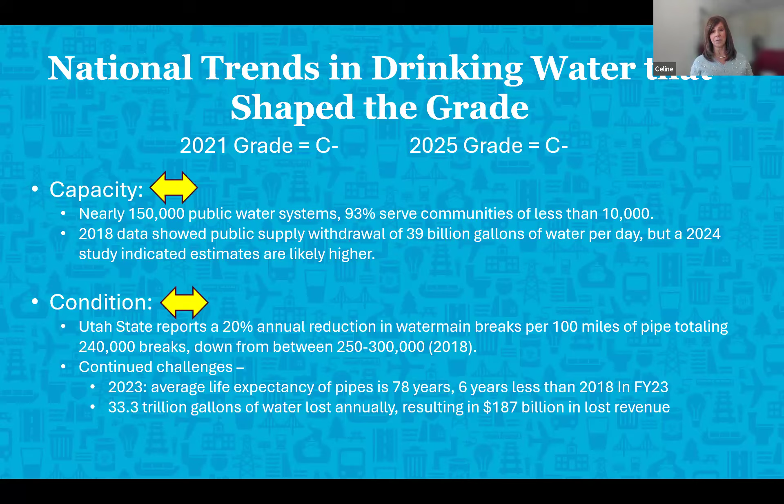So moving on to funding. Funding also pretty much remained flat. User rates have increased over the last 10 years. However, the majority of utilities surveyed by AWWA still felt like they didn't have enough funding to cover the full cost of service, both the capital and the operations and maintenance needs.

There was funding infused for the federal low interest loans for water capital projects, the Drinking Water State Revolving Loan Funds. But those funding levels really have not significantly increased for the drinking water sector. And we have a practice where a lot of that money gets earmarked by Congress for specific project grants, which takes money away from the states that can get those loan funds approved.

Under future needs, the needs have increased, not surprisingly, as things have been deferred, so that reduced the score in this category. According to EPA, needs have increased about 30%, with a total need of $625 billion over the next 20 years to meet a state of good repair, up from $473 billion previously projected.

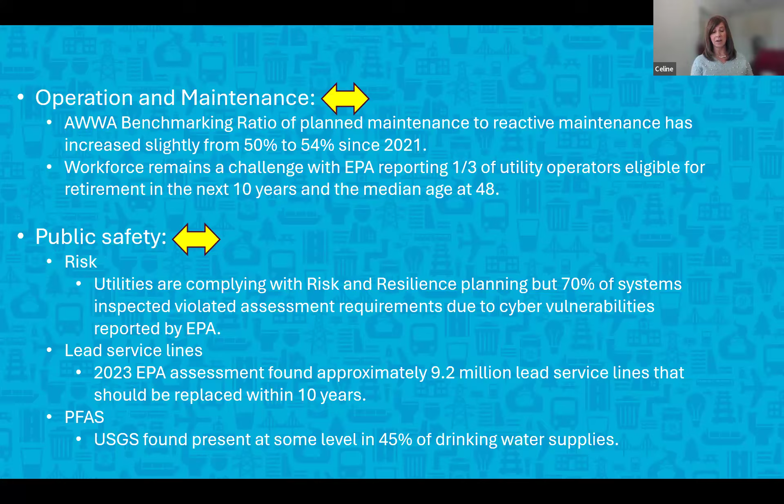Water quality issues continue to be a challenge due to lead service lines, a hot topic of the day. Having to replace over 9.2 million lines in the next 10 years is very significant. And obviously, we've all heard about PFAS and emerging contaminants that threaten water quality compliance and could impact 45% of the water supply, according to the USGS.

Resilience challenges have increased, which reduces the score in this category. Climate change and extreme weather, including hurricanes, floods, freezing, and droughts, continue to pose threats on infrastructure where pipes are breaking, pumps failing, and water quality being impacted.

Only 72% of utilities have completed their required risk and resilience plans, including updating emergency response plans, even though these were all due in 2021.

Innovation continues to advance, increasing the grade in this category. There's greater use of digital technologies and data-driven decision-making, leveraging things like machine learning, AI, and performance dashboards. AWWA shows that 43% of utilities plan to install new IT systems, and 46% plan to install digital meter reading, which provides greater access to data for decision-making.

Moving on to the wastewater report card. Again, the 2025 grade remained the same as the 2021 grade at a D plus. Overall, the team did not find any significant data or trends to change the grade.

In terms of condition and capacity, the grades remain flat. For capacity, the number of wastewater systems has increased to serve urban areas. However, some systems still remain stressed for capacity during wet weather events or in those growth areas.

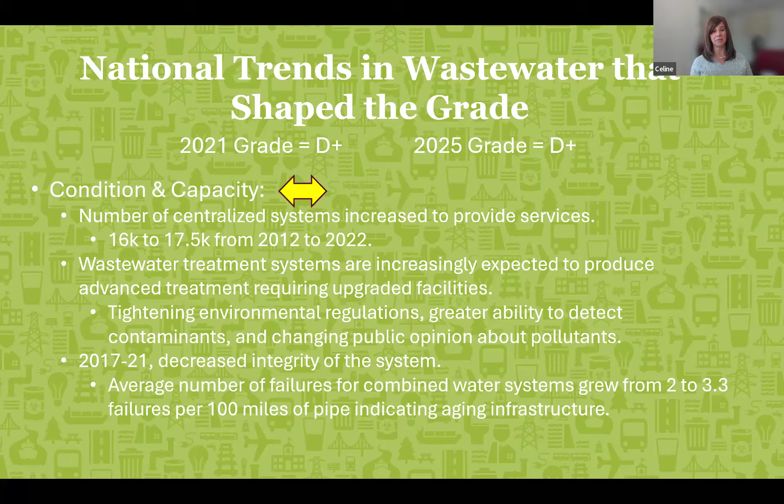Operations and maintenance remain flat, where most utilities have digital tools to address their operations and maintenance needs, but many have not been able to upgrade these systems or really figure out how to best manage and leverage the data to help them with decision making.

Funding also remained flat. While average sewer bills have almost doubled, it's still not keeping up with the cost for existing capital and O&M needs. And further increases sometimes make it unaffordable for disadvantaged areas.

Funding availability was also flat. Some additional potential allocations were made by the IIJA for the Clean Water SRF, but most of the dollars were really allocated to address new needs for emerging contaminants or allocated to disadvantaged communities and were not available for the wider, larger to medium utilities.

AWWA also reported that utilities are generally trying to invest about 1.5% to 2% for replacing infrastructure. This equals somewhere around a 50 to 100 year lifespan, but this is probably too low, right? And we also need to deal with advanced treatment processes for considering future emerging contaminants.

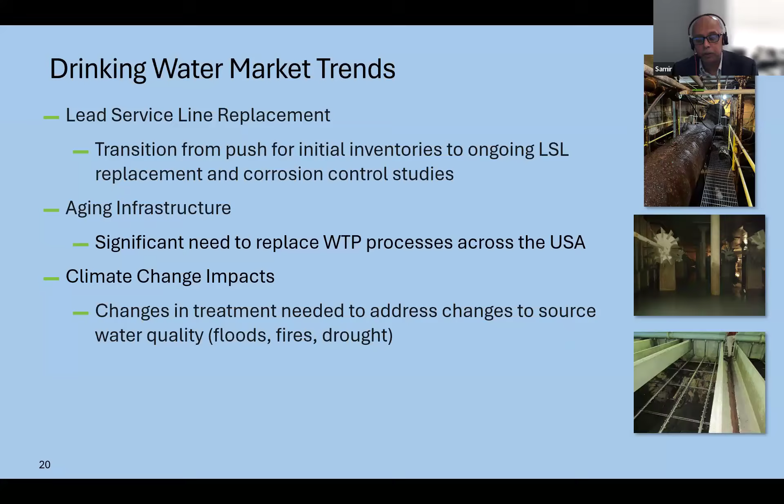And we talked about the climate change impacts. We've seen changes in treatment at water treatment plants needed to address changes to source water quality. So any floods, fires, or drought could cause a change in source water quality that would lead to a project requiring changes to the way you do treatment at the water treatment plant.

On the wastewater market side, on the drinking water side we've got the PFAS that Celine talked about, but on the wastewater side, we're starting to see PFAS in wastewater and biosolids in various states.

One thing that's different on the drinking water side versus the wastewater side: on the drinking water side, the EPA's got rules and regulations to drive some requirements for PFAS treatment. But on the wastewater side, we're seeing more of that happen on the state side, with each state trying to establish their own regulations and monitoring requirements.

That's kind of driving, especially on the biosolid side, is where we're seeing all that happen. Treatment optimization and efficiency is a big thing. Given the fact that funds are limited and there's a lot of aging infrastructure, there's this idea of doing more with less - how can we squeeze out more capacity in a wastewater plant by reducing infrastructure needs? That's exactly what my case study is about.

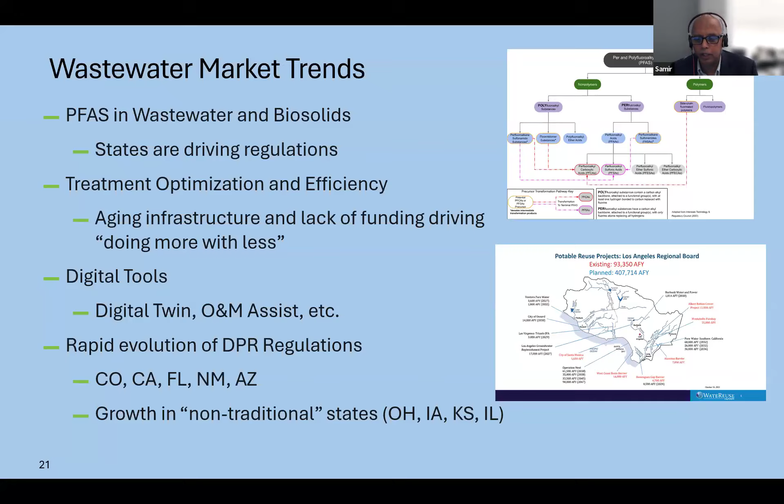Digital tools are coming up big - you see digital twins, tools to assist with O&Ms, etc. On the reuse side, we're seeing a rapid evolution of direct potable reuse regulations in several states. We're also seeing growth in non-traditional states like Ohio, Iowa, Kansas, Illinois - the Midwest - where we're getting reuse projects, when you might think reuse was mostly in California or Texas. So a lot of people are thinking about that.

So now let's jump over to this idea of doing more with less - process intensification in wastewater treatment. The idea here is to use innovative technologies to make treatment more efficient, more compact, and more cost effective, with the goal of lowering energy use, using less chemicals, getting higher resilience, higher quality, higher capacity, and also increased resource recovery.

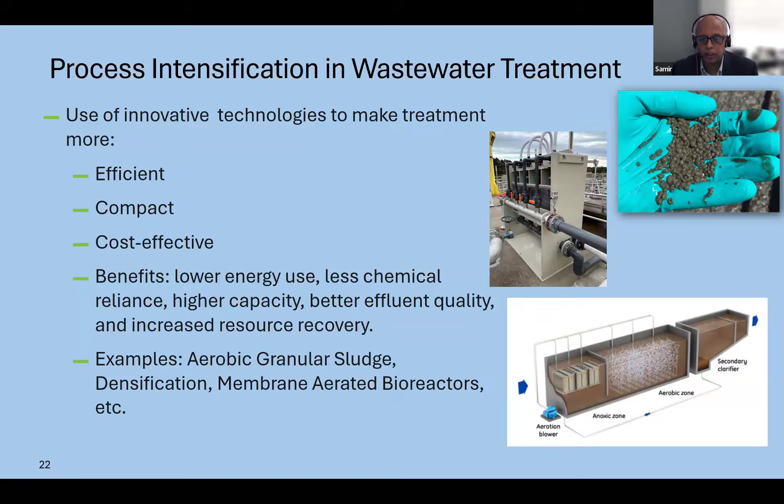We've got a lot of these methods now, and I'm not going to get into detail on all of these technologies, but I will talk about the application of one such technology. If we move on to the next slide, I'll talk about my case study, which is for the city of Wichita, Kansas.

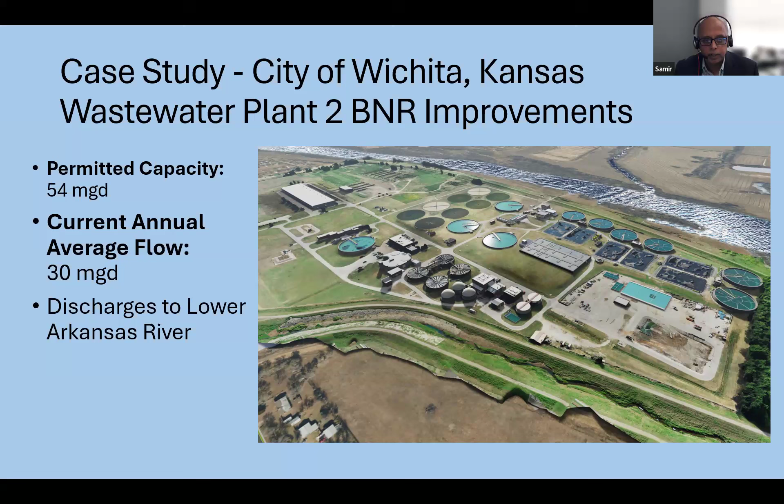It's an ongoing project for us at wastewater plant number 2 - the biological nutrient removal improvements project. The permitted capacity of this plant is 54 mgd, the current average flow is about 30 mgd, and the effluent discharges to the lower Arkansas River in Wichita.

Here's what the project's about: the existing treatment plant has trickling filters in a two-stage process - the first stage is trickling filters, the second stage is nitrifying activated sludge. The second stage facilities were built in the late 80s; the trickling filters are from way before that. The existing aeration basins are not designed for BOD removal or BNR, and the plant received BNR permit limits, so we now had to design a system to remove phosphorus and nitrogen, which the plant was not designed for.

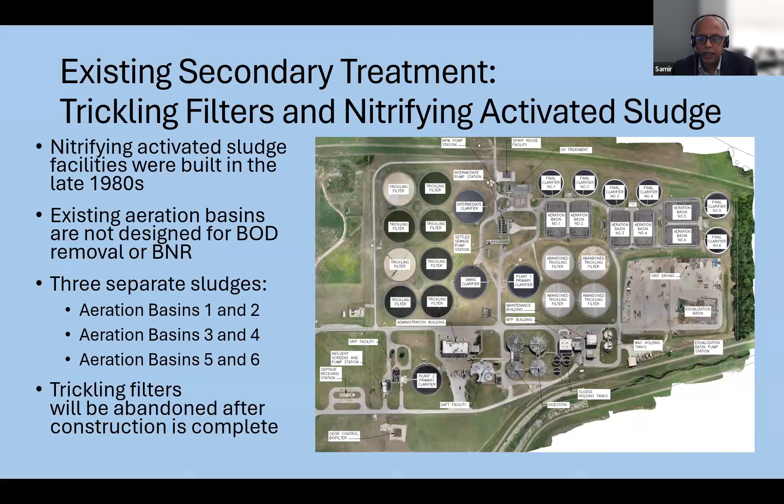Also, I want to point out there are 3 separate systems - you can see on the graphic aeration basins 1 and 2, 3 and 4, and 5 and 6 in the top right corner, so they're basically 3 separate plants. I'm bringing that up because it'll play into how we did some of the piloting work. Also, as part of these improvements, we're going to abandon the trickling filters. The goal was to improve the process, meet new permit limits, and abandon old aging infrastructure at the plant.

To do this, the first step was to use this innovative technology called InDense, which basically uses hydrocyclones to essentially intensify the process.

You can granulate some of the sludge and settle better. By settling better, you can increase what's called the mixed liquor capacity of the aeration tank, and therefore increase the performance. So that's the idea behind this process.

We installed this pilot in only trains 5 and 6. There were 6 trains in this plant, but we ran this pilot only on a couple of trains. You can see from the picture the setup was pretty simple. We installed these skids on top of an existing tank, a tank that provides flow distribution. It was a 4-cyclone InDense skid, with a feed pump and a return pipe, and you can see a lot of temporary piping.

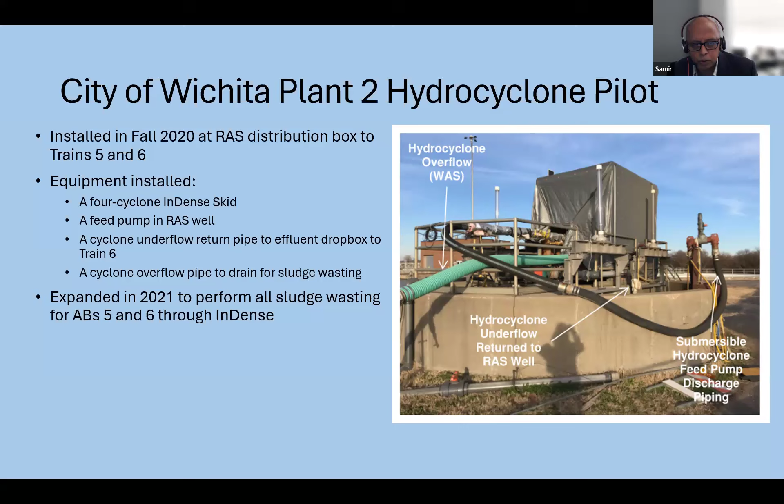We started off with 1 train, but then we expanded it to 2 trains in 2021. Let's move on to the next one.

As we're doing these pilots, our goal is to figure out if we're really getting benefit out of the pilot. The unique nature of this facility allowed us to do a side-by-side comparison. We had 6 basins, and first we started off piloting in just basin number 6.

SVI 30 is a measure of settleability, how fast the sludge settles. In that orange line, for basin number 6, we always got stable readings. The lower the SVI, the better the settleability, which is a good thing - it's better for the process. That shows we've got a stable process.

In the other basins, not only were the SVIs higher, they were also a little more inconsistent. So that's one thing that came out - thumbs up to that. We showed that the process would do its job and it would help. Moving on to the next slide.

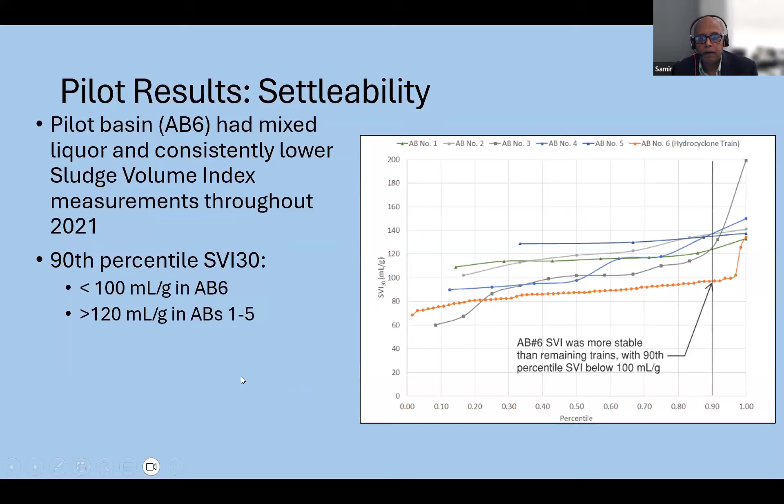Okay, now things really changed. I live in Texas, and several of you may remember winter storm Uri in February 2021. I live in Dallas - we lost power in my house for over 2 to 3 days. We had no power, and of course it really hit big time in Texas and in the Midwest.

It was freezing downright. What we observed as we were going through this pilot was that the basin with these hydrocyclones, this InDense process, kept chugging along - you can see the orange line down there. It met its nitrification all the time.

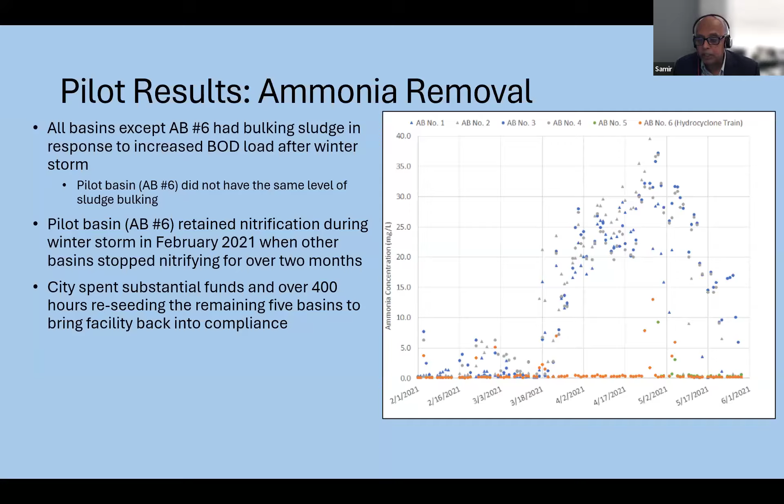Meanwhile the other 5 basins completely lost their nitrification. They had a process upset because all the bugs died, and the process was not stable. So the city spent substantial funds and over 400 hours reseeding the remaining 5 basins to bring the facility back in compliance. But basin number 6 had no bulking and it met all its permit requirements.

We also wanted to abandon the trickling filters like I mentioned before, and modify the system to make it more operator friendly - what we're calling a one-sludge system, meaning bring all the RAS and WAS to one structure upstream of the BNR structure. That's the new green BNR structure we wanted to construct, and then distribute the flow from there, instead of having separate plants like basins 1, 2, 3, 4, 5, and 6 where operators had to constantly run around managing 3 different plants. Now we're trying to run one plant and bring all the RAS back together in one place.

Through this process, we incorporated a full-scale hydrocyclone facility in the upgraded plant, bringing it all together with this innovative technology.

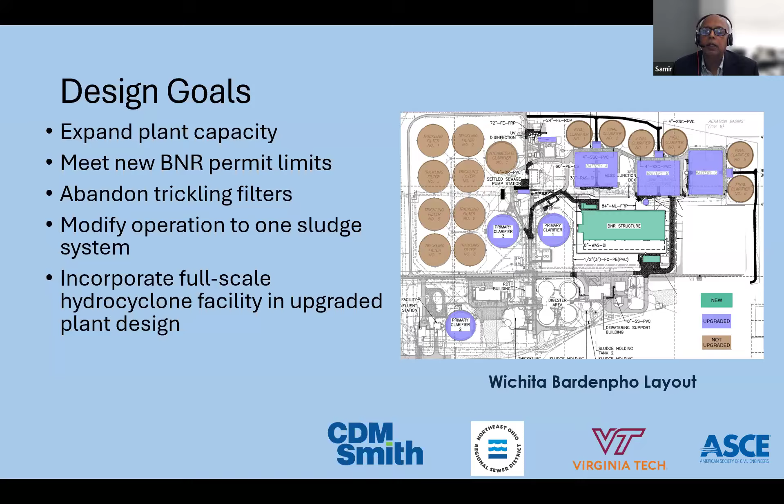As we incorporated this new technology, we had to think through a lot of design steps: where to locate it in terms of process, how many hydrocyclones to bring in, the location of the facility, how to pump it, how to return the underflow, what to do with the RAS and WAS, whether to put a building or structure to house these, how to operate them, and if they're not working for some reason, can we bypass them and what would we do about that. All these were considerations we had to go through just for that aspect of the design.

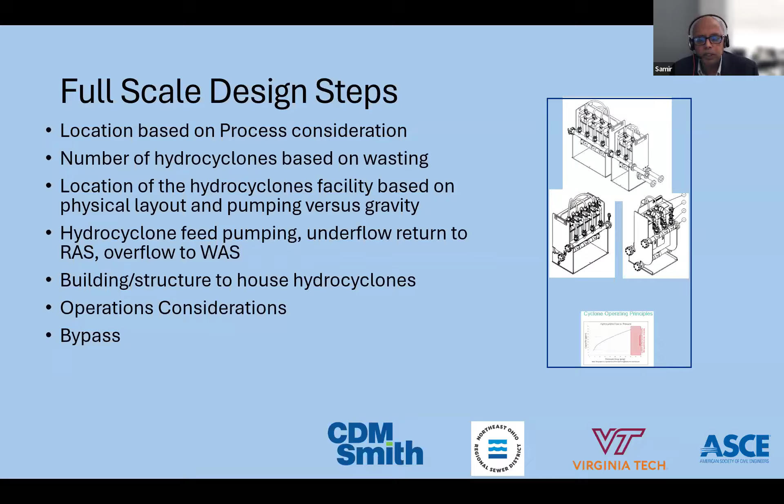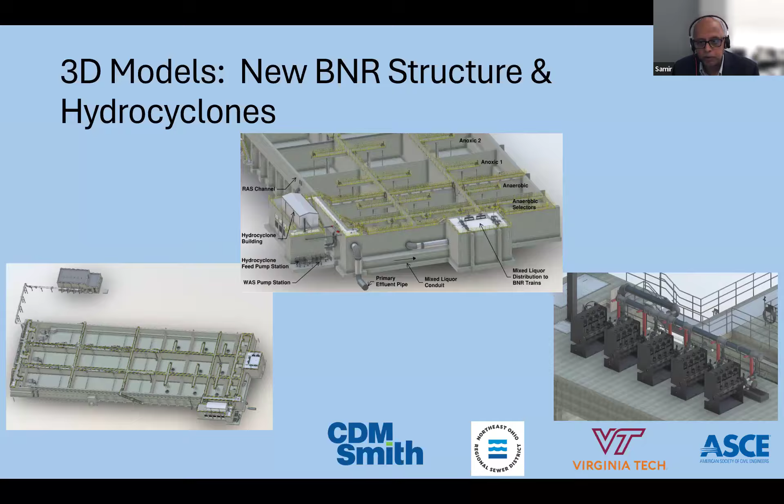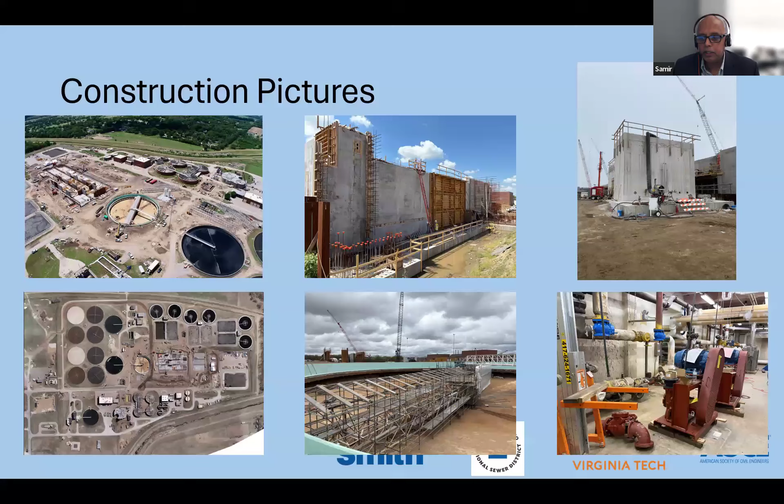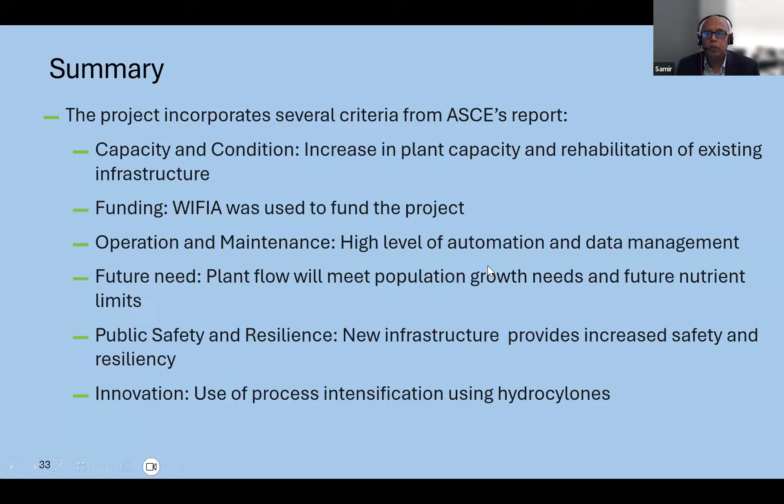So with that, I'm going to hand it over to Lita to talk about her slides and the funding issues.

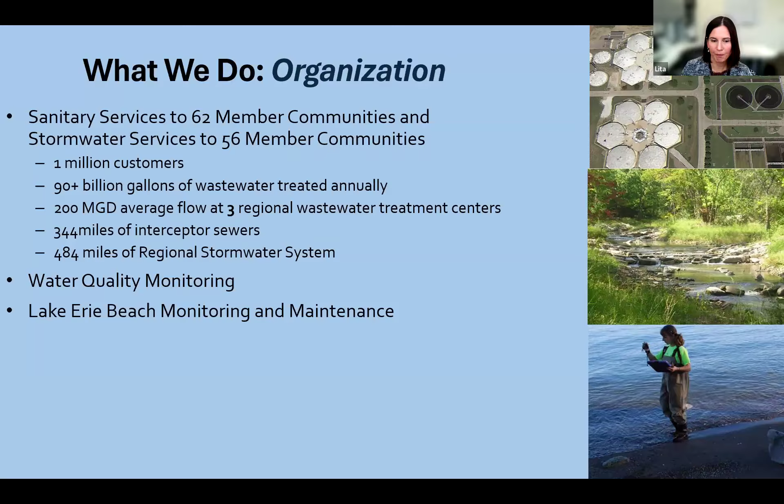I want to focus a little bit on our wet weather program. So in addition to the day-to-day collection and treatment of wastewater, we do have specialized wet weather programs at the Northeast Ohio Regional Sewer District.

Our Project Clean Lake is our CSO long-term control plan, which was signed into effect in 2011. It's a $3 billion program. We're a little over halfway through that program, and that is funded through our wastewater rates, based on water consumption. We also have a separate stormwater management program, which collects around $50 million in revenue, a separate fee on the utility bill. That program specifically addresses regional flooding, erosion, and water quality issues, and is a separate fee based on impervious surfaces.

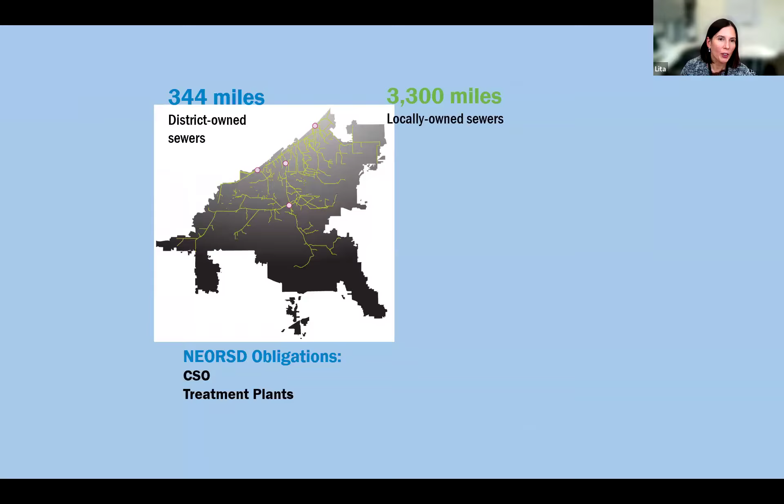So as I mentioned, the sewer district is responsible for those large interceptor sewers that come to our treatment plants, so we have those obligations as well as implementing our CSO long-term control plan. But we also have 62 member communities, and those communities have over 3,000 miles of locally owned sewers. Those communities have issues such as sanitary sewer overflows and aging infrastructure, which lead to a lot of infiltration and inflow, also known as I&I.

A lot of times there are illicit connections to these sewers causing water quality issues. And in some areas of our service area where sewers have not been extended, we do have septic tanks, a lot of which in our service area are old and have failed.

So what I would like to hone in on today is more on the local side of all these local responsibilities of our member communities, because they're a big issue. As Celine mentioned, when she talked a little bit about the funding gap, it's really difficult when there's a significant need to address aging infrastructure, building new sewers, when you don't have a funding source.

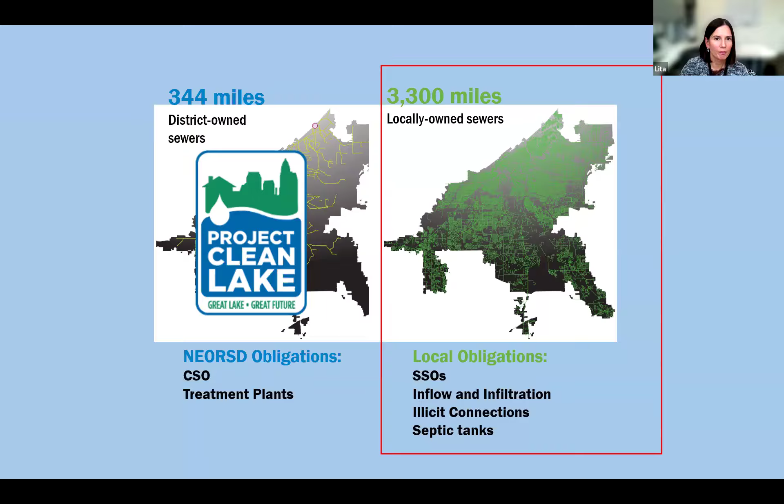One other thing I wanted to highlight with our local sewers is something kind of unique to Northeast Ohio, our common trench sewer manhole and trench configurations. This was probably considered innovative at the time when they were constructed 75 plus years ago, and they're very problematic today when you have the storm sewer constructed right on top of the sanitary sewer, sometimes separated by an invert plate.

When those invert plates or those sewers age, the water seeps into the lower sanitary sewer and causes a host of issues such as basement backups and sanitary sewer overflows. So this is a significant issue in a lot of our local communities where they're seeing a lot of these issues causing these types of problems.

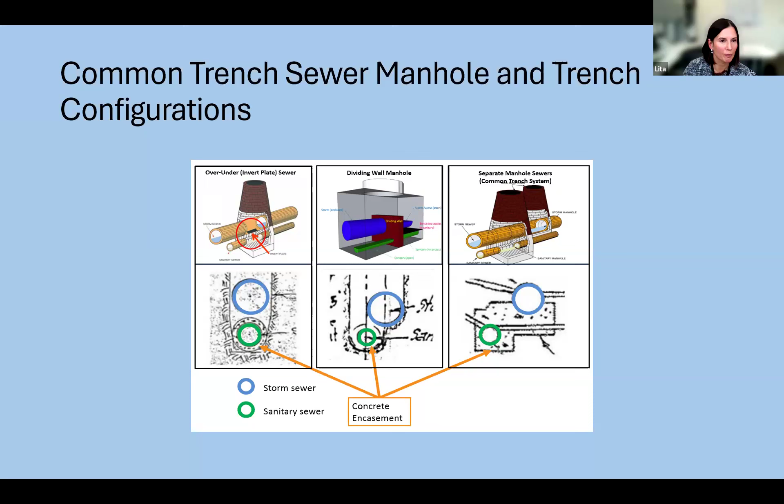So I want to talk a little bit about our local sewer system evaluation studies that we completed back in 2022. Taking a step back, when we were implementing our CSO long-term control plan, we were doing some advanced facilities planning to lay out the long-term program, how we were going to execute our consent decree.

And we did an integrated planning evaluation as a part of that study. What we came to realize is that while we're addressing our CSO issue from the district's perspective, there are a lot of these local issues, as I mentioned previously. So with some forward thinking of our sewer district leadership and with the support of our board of trustees, we began these local sewer system evaluation studies, which are planning level studies.

This was taking the reported problems from our member communities and giving them tools such as strategic field work, dye testing, and a lot of flow monitoring across the study area to assess how wet weather was impacting these local sewers. Then we built a model to evaluate where these problems manifest, confirming where reported problems were, and projecting where they may occur in the future.

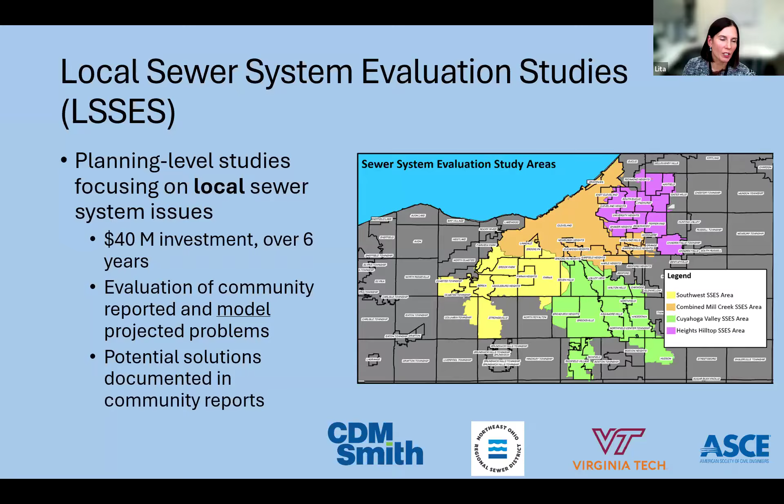As Celine mentioned, asset management is really important. One of the tools we provided local communities was access to geographic information systems, or GIS. We digitized all the local sewers in GIS and linked the drawings, so with the click of a button they were able to get all this information to readily address these issues.

The local sewer system evaluation studies develop solutions into 3 categories. The first is known problems, mainly community-reported issues, mostly basement backups, and known structural SSOs that were activating. The level of service we evaluated for these studies was the 5 and 10-year rainfall event, developing solutions in the short term.

Tier 2 was excessive infiltration and inflow—areas that didn't have problems, but had significant amounts of flow. Your eyes are not deceiving you: at 50,000 gallons per acre per day, we were seeing much higher results in particular areas of these study areas. As I mentioned, common trench configurations have potential for cross-flow pollution, causing issues to receiving waters, polluting streams and our lake.

So again, prioritizing those into midterm solutions. And then, as I mentioned, model-predicted problems—these may not be reported today, but something for communities to keep in the back of their mind. Due to aging infrastructure, they may see these basement backups in the future based on these modeling tools.

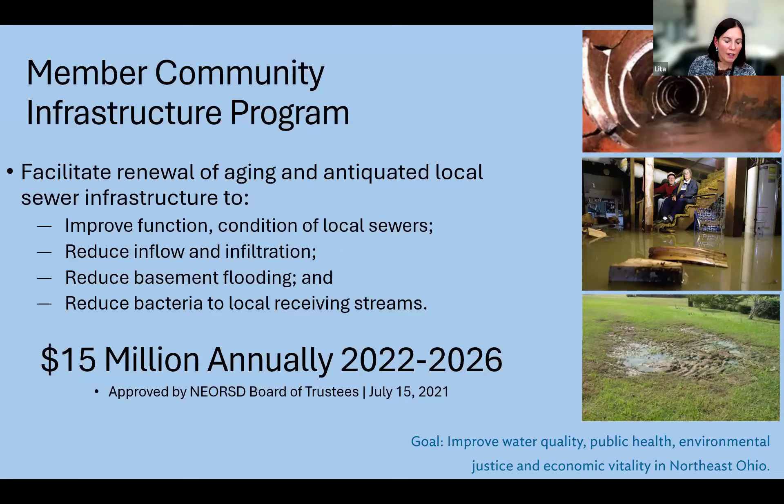In total, the program has invested to date $123 million towards 159 projects. As I mentioned, this is a competitive grant program with a match requirement, so it has leveraged an additional $110 million in local investment.

Another funding source, previously mentioned, is IIJA. That program was launched right around when we completed the local sewer system evaluation study, so we were able to leverage the results from that study to help support our local communities obtain potential grant funding. Ohio received an additional $50 to $70 million in supplemental principal forgiveness loan, which is effectively a grant. We wanted to help support communities eligible for that funding obtain it, so we provided annual support to nominate these projects.

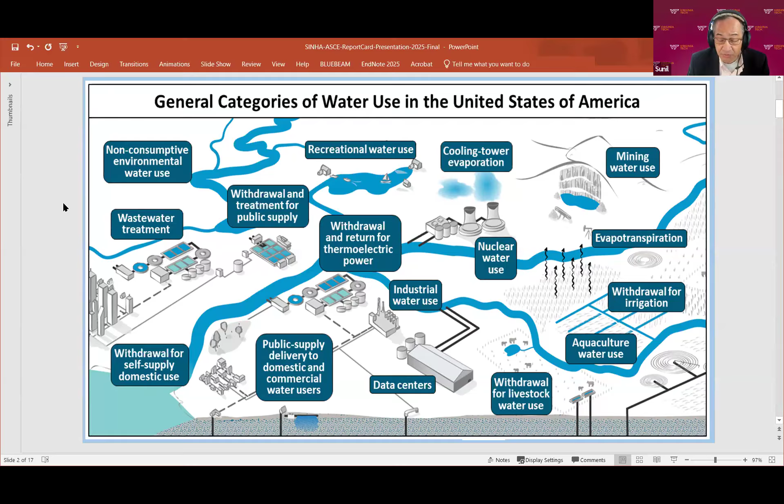So to truly understand this whole water efficiency issue, we need to touch all domains. We need to collect data because there are dependencies and interdependencies. But my talk today will just focus on public water supply. So this project came to us in 2022. Before that, this was under the SECURE Act. I don't want you to read it.

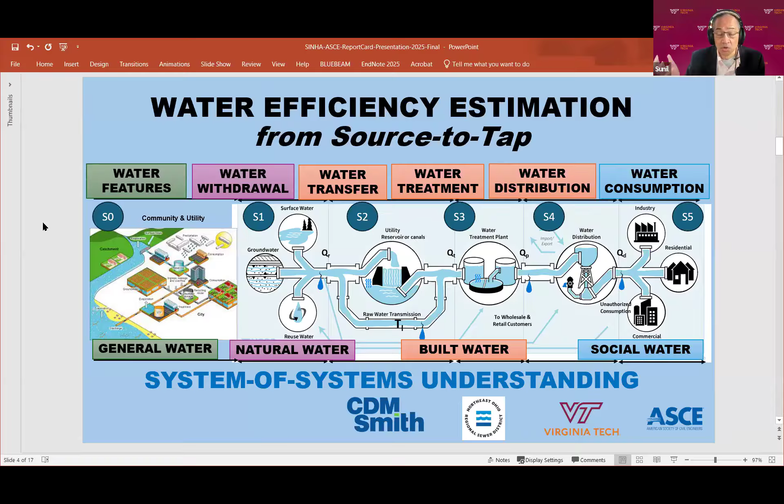Although the analysis is being done in systems 1, 2, 3, 4, and 5 to understand the whole water source-to-tap scenario, Celine brought this thing, collecting the data and good quality data, because data also comes in many shapes and forms. I can go on, but we have limited time here.

Data is not one shot. It's also time dependent. Is it 100-year data we are collecting? Is it a 1-year average? Because it depends on what scenario analysis you want to do.

So in the beginning, when this project started, the condition was from OMB that you have to pick one state east of Mississippi and one state west. So we started with Georgia and California in 2022. But we couldn't do much in California, because in Georgia, understanding and collecting all data, Georgia has 3,000 utilities. It's not like California, but it's still a lot of utilities.

We couldn't get data from each and every city and town, so how do you extrapolate, how do you interpret? There's a lot of issues there, right? I'm not saying these are perfect, but the methodology I'm going to show you will estimate in the right way, and this can get better and better. These are all machine learning algorithms.

But still, a lot of utilities participated within the state. Now we have many states coming in, I have to update this slide actually. And then American Water became a big partner, let me tell you. American Water, why? Because American Water is not just one utility located in one state, there are many, and they also have military bases, this and that. Why is it important? Because of the data characteristics, so that we can apply that.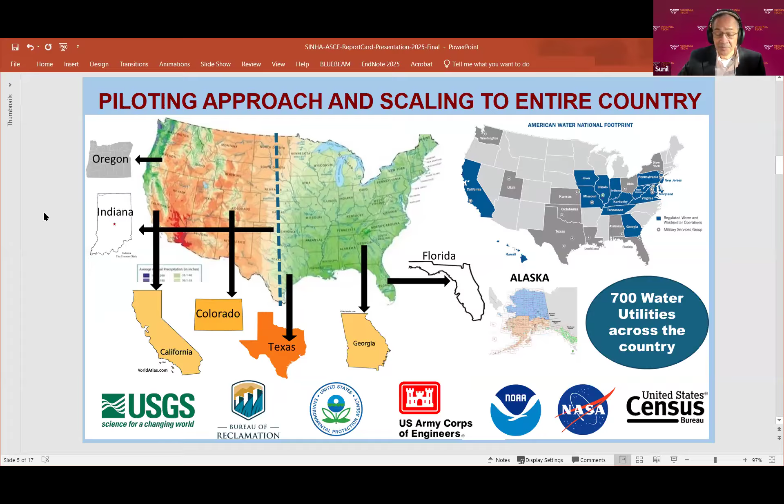So anyway, collecting all this data, once you have it, you'll ask me how this was done. The bottom-up approach we took is where we tried to select utilities, small, medium, and large, all over the US, also trying to understand their characteristics, whether they have surface water, groundwater, different kinds of situations.

The bottom-up was a very rigorous study where we had to sign memorandums of understanding with these utilities so that data could be shared, because they were scared of sharing this detailed data, they didn't want it to go into the public domain. So bottom-up was very rich, all GIS, all their SCADA system, everything. We got very good data from 50 to 60 utilities all across the US to really understand.

But that level of data we didn't get from other utilities, say 200 or 300. That's what we call the middle-out, where we created a cohort level analysis. This is like very detailed, all GIS. We know the pipes, where they're located, what is the diameter of the pipeline, many meetings and all those.

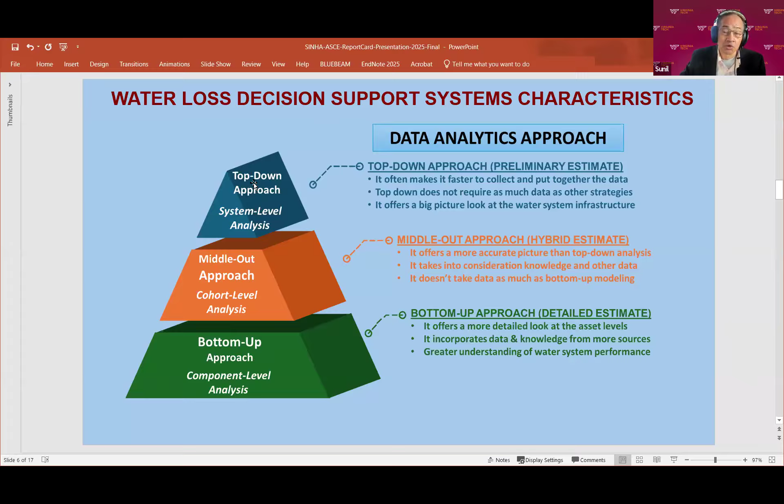To understand, because data is not black and white, data has the physics behind it. So understanding all that is very important. And then we can apply it now to the entire country. That's how it is, and I will show you the results. So that's kind of the overall approach.

So how the whole thing is working is just like ChatGPT. When you use it, you don't care about how the models are trained, but ChatGPT works in the same way. They search data from all over the world, but the concept is very similar.

So we have agents. If you look at the system, I'm not showing you system zero, but system zero is the characteristic which is flowing through across all 1, 2, 3, 4, and 5. But all these are agents from the computer point of view. So machine learning, these are agents.

So then you will say, okay, what is the agent for system one? Water quality and water quantity. But these agents are multiplying because you have groundwater, surface water. So agent is nothing but models, basically, right? But they are talking to each other so that error is not propagating.

And that's where these agents supply to the foundational model, which is the middle one. What you are seeing is that it takes the input from all of them, calculates the error and all those. But we do have checks and balances.

The QR, QP, what you are seeing here is how much water is being withdrawn by the utility, how much entering into the treatment plant, what's leaving the treatment plant, how much is going to the distribution. Of course, the errors are there because the meters are not calibrated, those kinds of things. But then at least we will know from where the error is coming, how it is propagating, which we can fix in the future. So that's how this whole thing is built up.

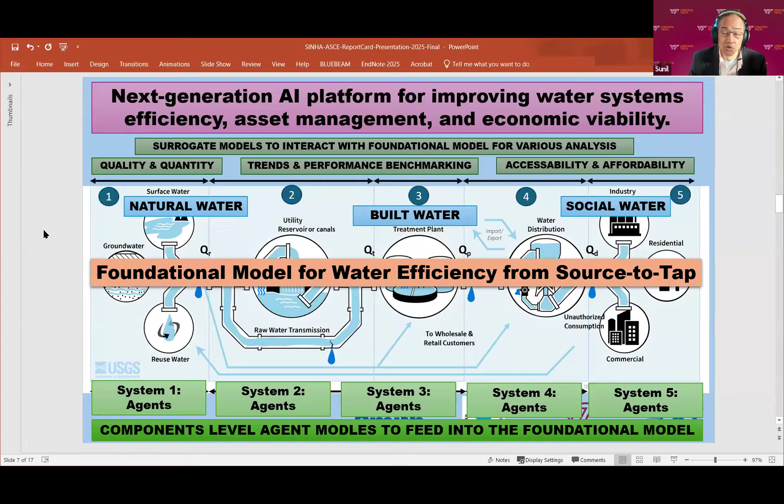So if you look at the flow diagram, it's very simple actually. First, we definitely need any city and town to tell us how they are withdrawing water, groundwater, surface water, how many treatment plants, how many miles of pipe they have, whether it's surface water, groundwater, what kind of filtration. So we need some basic characteristics, like a flow chart.

Once you have that flow chart from source to tap, then data. They don't need all the data in the world, right? They can start with very basic data, just like you go to a doctor, you don't need a CAT scan right away. So you can have a basic data set, then machines take over. Then performance, and I will show you that. Devils are always in the details. You can challenge me on how it is done.

Everything can be improved, but the whole structure has been set up in a very modular way, just like people do in medical and other industries. So this effort is not just by one university and a few students or one professor. A lot of federal labs and utilities are involved in developing all these models. So it's not just that I will claim the model is developed at Virginia Tech.

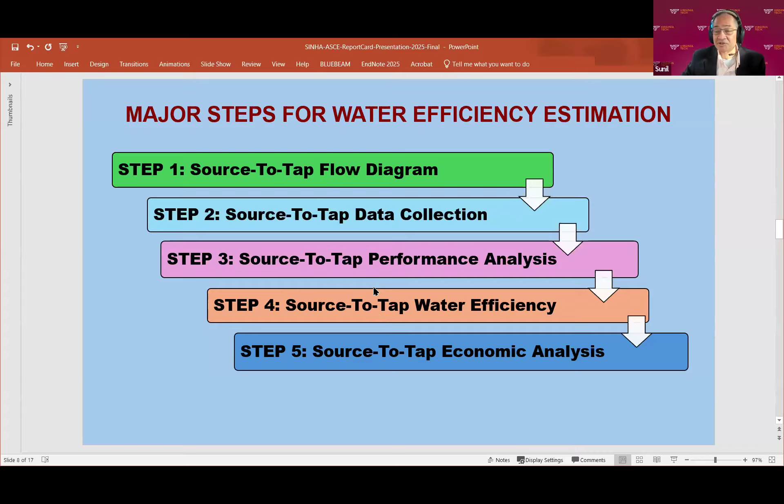Then performance analysis, water efficiency, and economic analysis can be done. So how is it done? These models, system one, system zero, the data comes in. This is the foundational model. We have three foundational models: one estimates performance, performance is tied with efficiency, and efficiency with scenario analysis.

These are very modular structures. What that means is anything can be changed. Any agent can be plugged in, it can be deleted if we see fit. So all models right now are frozen, meaning it's not in learning mode. Now, whatever utility we are feeding the data from, it is predicting the result.

The model is not learning, it has been tested and trained, it has been frozen. Next year we can come back, unfreeze it, and train it. But it will not lose the memory of what it has learned, just like a child going from school to college doesn't lose its memory. It will keep learning, but the structure is very modular.

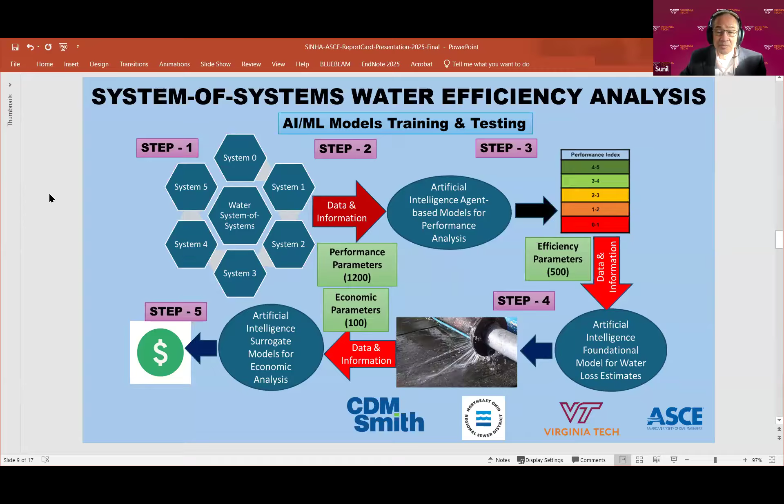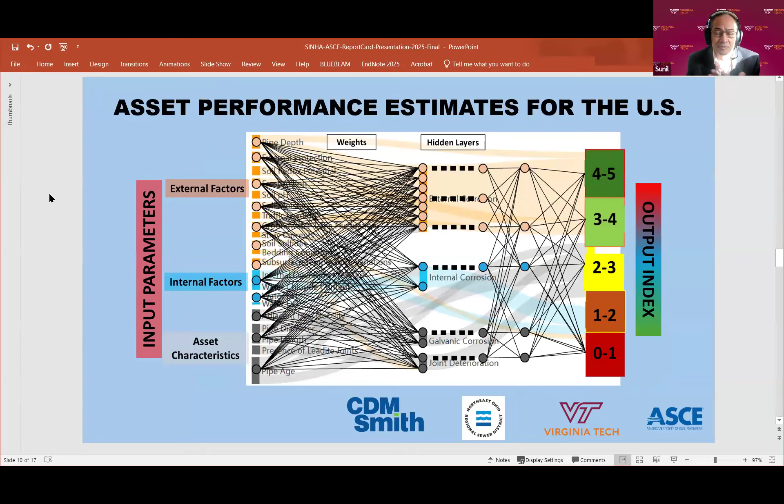We can bring in any agent. This is just showing you how this performance works, using the same ASCE report card approach. We don't have an F grade here, but the highest is 4 to 5, which is A grade, then B, C, D, and E. F means it has failed and you need to go replace it. That's why we use A, B, C, D. Then you can relate this to efficiency, how much water gets from source to tap.

The disclaimer here is that we are still working on this, it has to go through the review process. But we've checked what USGS is reporting and others are reporting, and it's coming very close because our approach is bottom-up, estimating from cities and towns, while USGS's approach is top-down. They claim the water withdrawal for public water supply is around 37 billion gallons, while our bottom-up estimate is around 41. So we're within the margin of error.

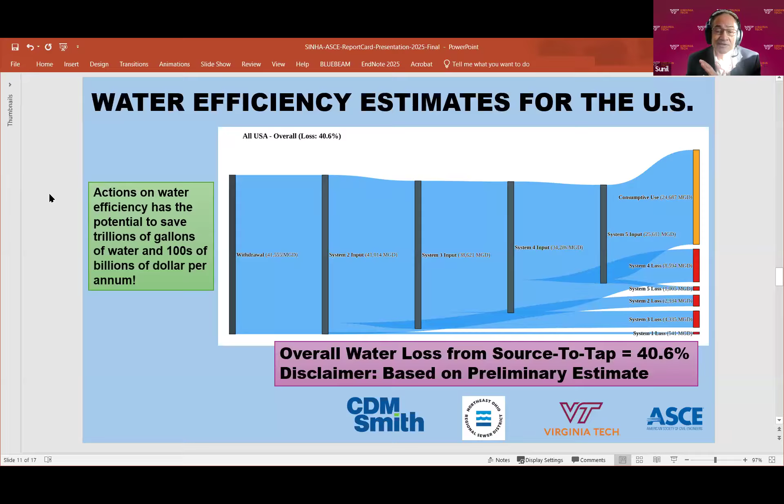It's not perfect, but anything can be improved. The key right now is the methodology. Then economic analysis can be done.

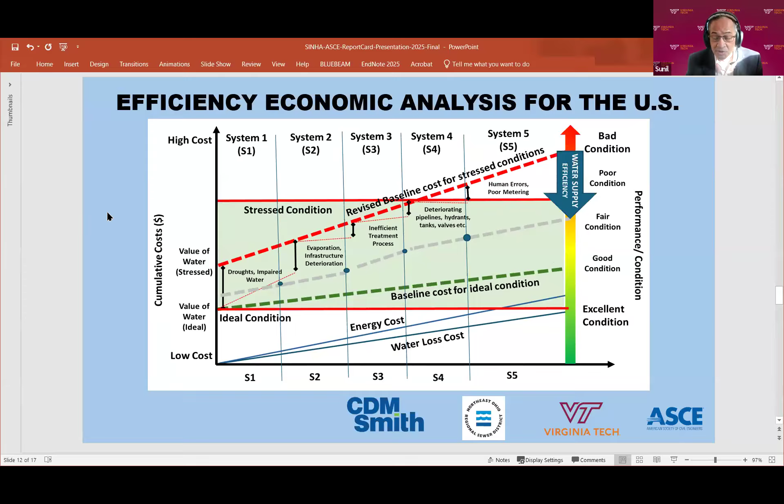This is because of aging infrastructure, inefficiency, and various practices—I won't blame everything on leaky pipes or infrastructure, there are many things going on. But utilities cannot bring costs down to the green level, though at least reaching the dotted gray line is achievable. That's scenario analysis. This is all decision support, not decision-making tools. So it's up to the utility how they want to use that.

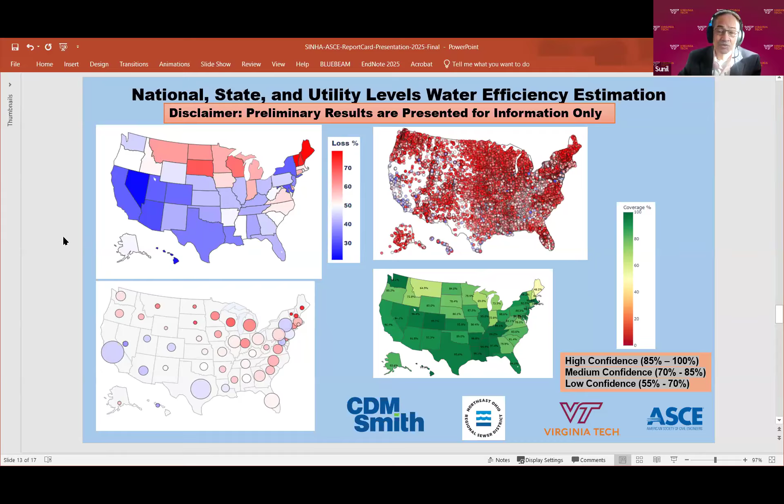But a lot of utilities, confidence is just 50%. That's like guesswork, right? So that we have to keep in mind.

Coming to the data, I can go on and on. We have to be careful here when we say about data. When I showed you one slide, average loss is 40% in this country. What does that mean? Average 40 doesn't mean much. That's not an average because your data is not normally distributed. Just like a cast iron pipe, we have seen a cast iron pipe can go from 20 years to 200 years. So how can you take an average of that? And if you are replacing the pipe based on average, you are pulling the pipe early, that pipe could have lived for another 20 years.

So those are very important things, and that's what I have written here. Design life is not performance life. You cannot assume that a pipe is laid, or any asset, and it's going to last 100 years. No, it will not. A baby is born healthy doesn't mean that it's going to live that 100-year life.

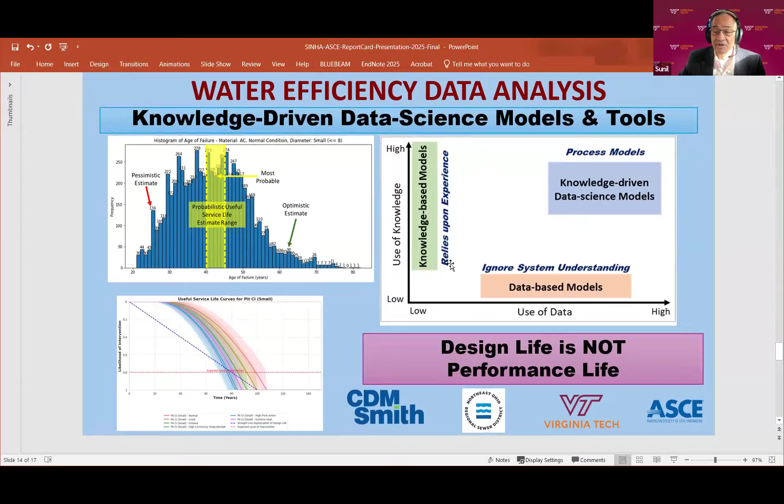So our whole model is based on data and knowledge, because nobody can claim they have all the data in the world. So you have to integrate data and knowledge. All models are trained in that way to mimic that.

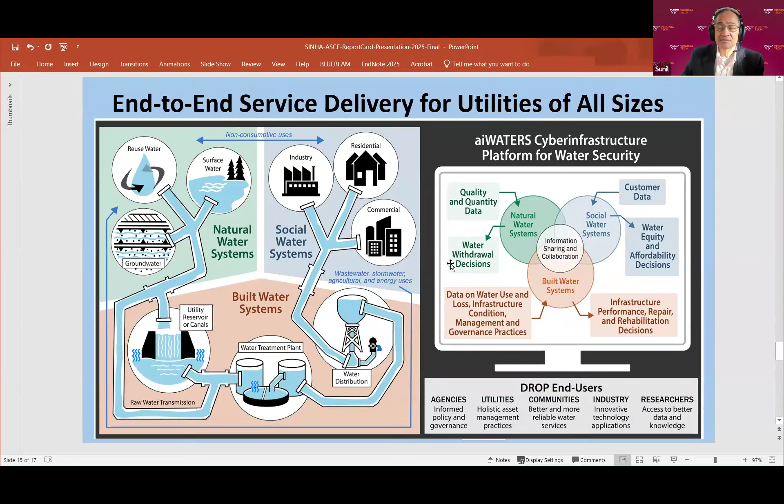We haven't done it yet right now, but that is our aim. But why does a utility care about these models? They want that interface where they can put in data, just like you guys use ChatGPT, right? Everyone uses ChatGPT, you don't care about the server, you just want an answer. You want a reliable answer, you want trust and all those. So this we still have to do.

So we are not done yet. But the benefit, I feel, is big, because each utility cannot collect the data and develop the AI model on its own. AI will not work that way.

I did my PhD in artificial intelligence 20 years back. So I'm a civil engineer, but my PhD is in AI. AI will not work if you're going to develop statistical models and all those with limited data. It needs a massive amount of data to learn the patterns.

So that's why you cannot combine, like, East Vermont data with Atlanta data. You all have to understand the characteristics of the data. You cannot just merge data. And also the long-term patterns in the data are important to understand, it cannot be just one sort of data point that you use to predict that an asset is this grade or that grade. So those are important things.

So I feel this is a great benefit. This was mainly aimed for the utilities, but state agencies are involved too, and they can also benefit from this, to see how much utilities have a permit to withdraw, say 50 million gallons, but if they're losing 20%, 30%, that needs to be taken into consideration.

And all these models will be free because this is all taxpayer money. This will be at a national scale.